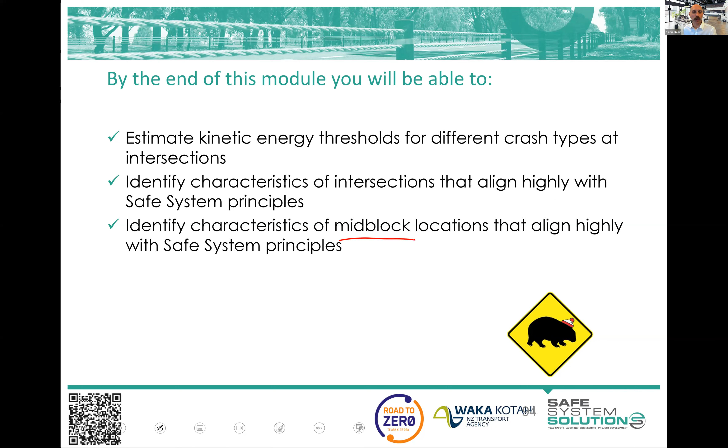Now it's an interesting time with independent assessments of transport projects in New Zealand. Road safety audits have been around for quite a while - I'm just trying to think, in New Zealand, 25, 30 years almost. They're pretty well known, pretty well respected as an independent assessment of a transport project to try to ensure safety.

Design reviews are commonplace as well. So if somebody is designing up a new intersection, new shared path facility, whatever it is, you would expect there to be a design review process where somebody who is not the designer would review the design - common practice there, checking calculations and checking logic and those sorts of things.

Safe system assessments then came along, and they sort of overlapped road safety audits a lot, and a little bit of design review in there.

Then there's sort of safety in design, which is thinking about, well, can whatever we want to create be built safely, be maintained safely, be decommissioned safely even.

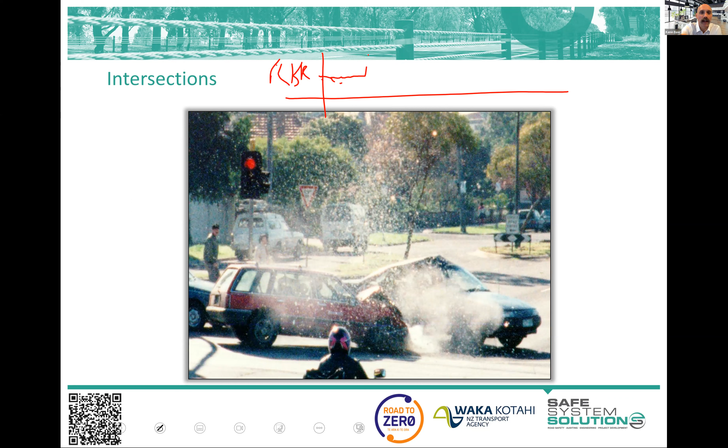But anyway, net risk - if you look at a length of road, and it doesn't really matter if it's a rural length of road or an urban length of road, you'll see risk, and it'll have some level of risk, and then it'll have spikes. And the spikes will be the intersections. That's not a great diagram, but that's kind of what it's going to look like.

And the intersections are an interesting spike in risk for a number of reasons. Well, first of all, you do have that obvious vehicle-to-vehicle conflict potential, and you see the picture on the screen there of vehicle-to-vehicle conflict. You have a point where then you've got pedestrians crossing, cyclists crossing, people wanting to turn. So I use the term turbulence - there's a lot of turbulence at an intersection.

You end up with a lot of roadside hazards around intersections: signal pedestals, light posts, and if you've got power lines that need to turn a corner, you've got to put a pole there too. So you end up with a lot of physical infrastructure around this. Because of that turbulence, vehicles will avoid it, and we see runoff road crashes increase at intersections as well, with vehicles leaving the road into lots of fixed hazards. It's a fairly nasty mix.

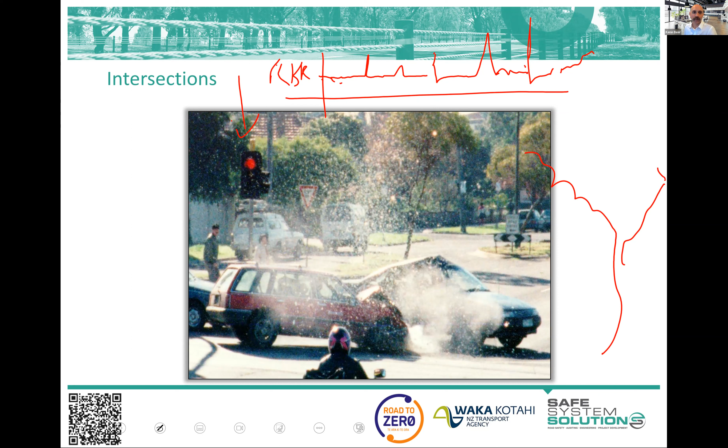Monash University Accident Research Centre at one point came up with high-level principles for what would make an intersection better aligned with safe system principles. You can see they've got fewer vehicles and fewer intersections. They're pretty high-level, strategic planning style ways to think about it, but it's nice and neat because we can get big wholesale change if we look at fewer vehicles and fewer intersections.

If you remember back to what we talked about at the end of the last session, we talked about exposure times likelihood times severity — that was our risk formula. Those fewer vehicles and fewer intersections are about exposure, less areas where vehicles can have that conflict. Fewer conflict points per intersection is a likelihood factor — the intersection's still there, there's still road users going through it, it's just less complicated, there's less turbulence, less points where they can crash, so the likelihood of a crash comes down.

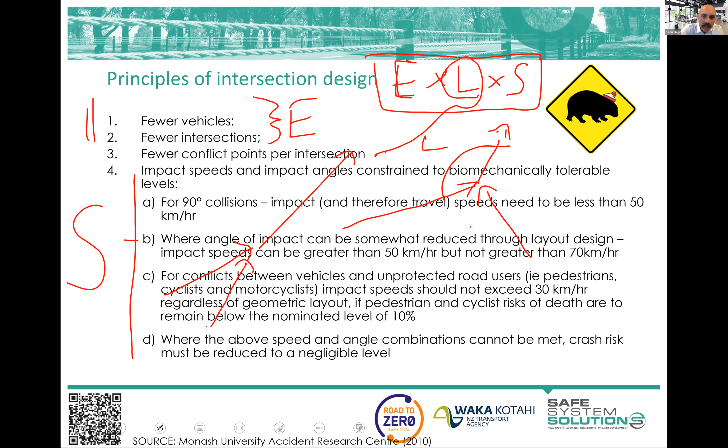You've got a certain energy that goes into the environment in that sort of crash. But when you put more angle on it, more of the energy goes into the environment — you sort of bounce off, don't you? So this has more energy transfer to the occupants of the vehicle than that. So if we're able to get a bit more angle on our crashes, from that perspective, we can have that crash at a higher speed.

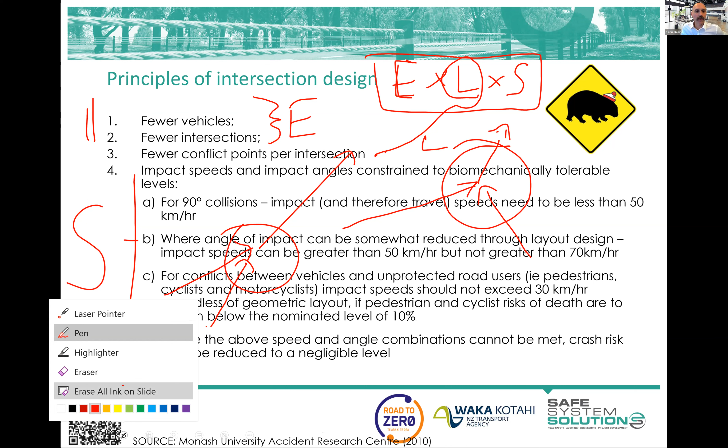When we get into having vulnerable road users crossing and involved, we're talking about not exceeding 30 kilometers per hour, but really we want to be lower than that, where we've got that pedestrian conflict. Next module, I'll talk a bit more about context around where in transport planning we'd think about these lower speed environments, and how you could design a high speed environment to be safe, or a low speed environment — it has implications on the functioning of your city or region. Now, if you can't get these, we're saying we need to fundamentally change the setup.

You can operate intersections at quite high speed, passenger vehicle to passenger vehicle, with high alignment with safe system principles. But you just need to do it so that the relative change in speed is not as great. Let me show you, like an on-ramp or big acceleration lane — this can happen at 100 kilometers per hour when these crashes happen.

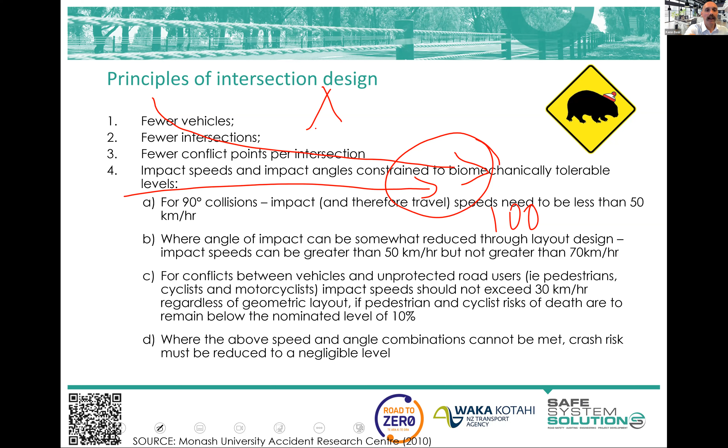But the delta V, the change in velocity, is very, very small. Certainly you want to think about what happens afterwards, run off road and all of that, but in terms of the initial crash, the forces and the transfer of energy is within tolerable limits. And that gives us good opportunity to continue to operate our high movement passenger vehicle or freight routes in a safe way.

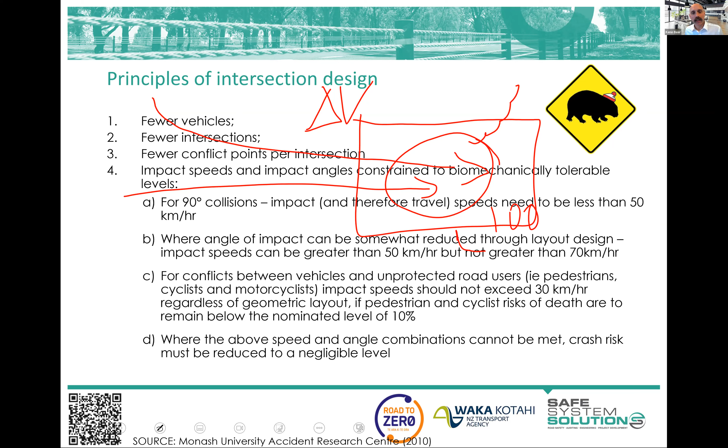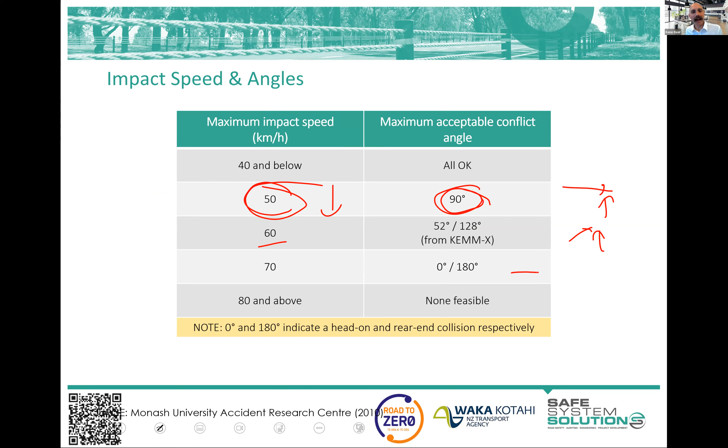So that's all quite theoretical, really. I've got some more figures here for you. When we talk about 90-degree angle crashes, that's 50 kilometers per hour or less. When you get more angle on it, we can go up to about 60 as the limit. Head on and rear end, we put that at 70. They're just broad brush speed-angle passenger vehicle categorizations.

So when you're looking at designs or existing intersections, you can have a look at the angles you think crashes will happen at.

Now, you don't need to be this precise, but if you're in CAD you can do this very easily, though you don't need to. You can just look and go, well, a vehicle coming out here and a vehicle coming there, that's about a 90-degree crash, isn't it? So we think about that for 50 kilometers per hour or less. It might be 104, but realistically, 90 is close enough.

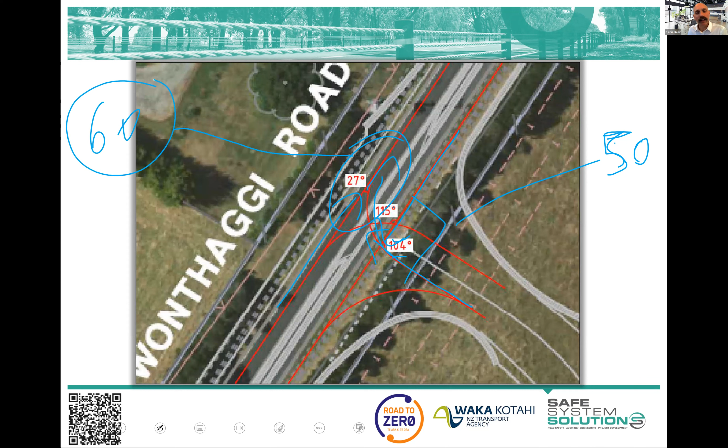And this one, they're going to be turning. We can probably go to 60 on that or below. So you're starting to look at conflict and think about speeds, and it gives you that relative point.

You think about the secondary crashes and run-off road crashes around intersections. Here's some research done by the Centre for Automotive Safety Research out of the University of Adelaide, where they looked at secondary crashes which resulted in death or serious injury - something had occurred at the intersection where vehicles had collided.

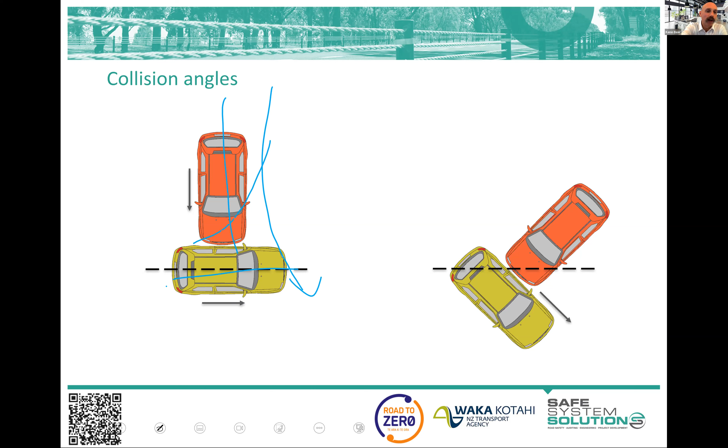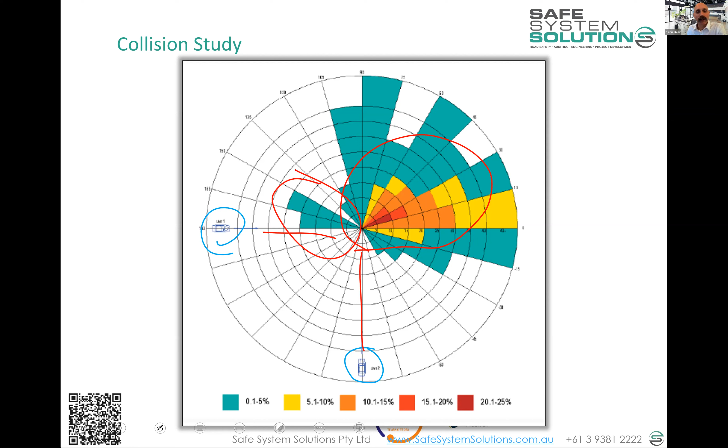Now, it could have been direct impacts like this, but it could have also been vehicles clipping, avoiding, and just clipping the end of vehicles and the like. But then they replotted that onto the same axes. So you've got a vehicle down here, a vehicle down there. They come in, they crash, and of course the bulk of crashes go out there. Do we need a lot of expensive research to know that? No, we didn't, but it's there for us if we do. There's a few interesting ones spinning off into those areas, but it's fairly obvious, I think.

Okay, enough of me talking. I'll do a little bit of explanation into this exercise I'm going to get you to do. I'm going to give you a little bit of time to have a think about this, but let me introduce it, and then you're going to do some thinking and come up with some ideas.

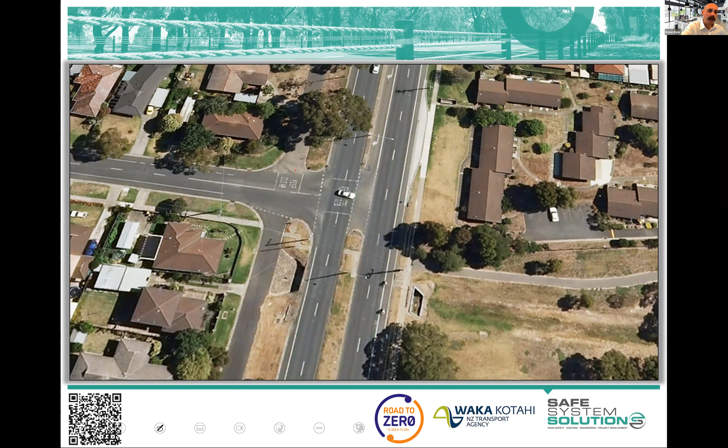Here we go. We've got an intersection. This major road, well, it's a state route, is a 70 km/h speed zone, and it carries about 21,000 vehicles a day at about 12% CV, heavy vehicles or commercial vehicles. Okay, so it's a pretty decent state highway.

This side road has a 50 km/h speed limit. It has about 2,000 vehicles a day. There's a school down here. What else can I tell you? That's a bus stop there. It's a shared user path. This is like the culvert drain - water goes in there and comes out there.

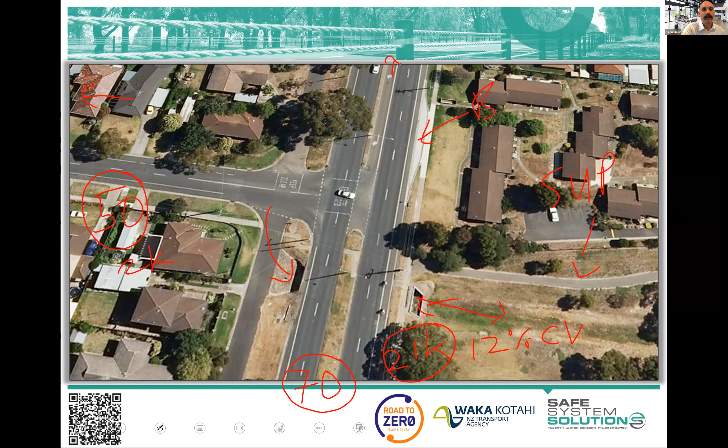What else can I tell you? Up the road, about 500 to 700 meters, maybe a little bit more, is a set of traffic signals. And there's another set of traffic signals about 2 kilometers down this way, or maybe 1,800 meters. More signals down there. Yeah, I think that's pretty good.

Let me show you it from ground level. So there you go, you can see it operating - vehicles, there's our bus stop. Got lighting, got this little service road thing going on here, which is a two-way service road.

Have a look from the other direction. There you go - there's your shared use path over there, shared user path. That's that drainage culvert-like thing.

So your task is to remove fatal and serious injury crashes at this location. Going forward, we don't want any more ever at this location. But you've got a budget constraint - I'm going to give you 3.5 million because I like you, I'm upping the budget.

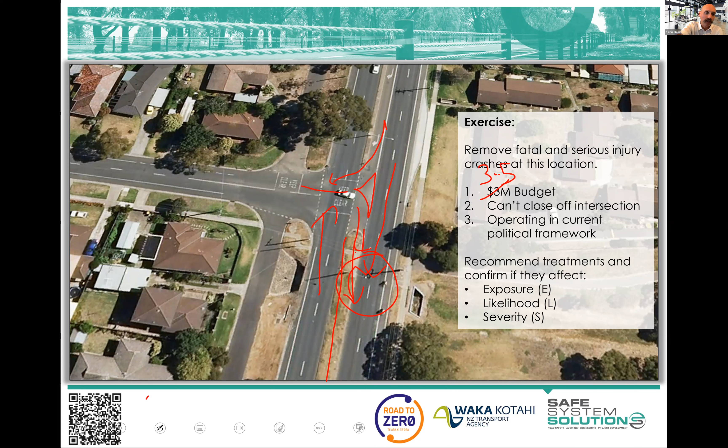There was really good work done by Shane Turner and a few others in New Zealand on the seagull intersection assessment tool, and I'm pretty sure we could put that into the resource. It shows you what situations a seagull may actually perform well in, but it's not a lot of the time that it's actually a really good treatment. So yeah, I can understand why New Zealand is making the seagull extinct. Okay, what else did we have?

So then we had some people talking about raising parts of this intersection. That's interesting, people talking about raised platforms, raising the intersection. We had people trying to go with the left in, left out, which I do like, because that simplifies the thing, removes a lot of that turbulence, but I said we can't really do that.

So bus priority transit lanes as an exposure measure, that's an interesting one, because yes, it actually does link in nicely with safe system principles. Putting people onto a safe form of transport, less vehicles, less exposure, and it is an exposure one. I'm just skimming through these wonderful comments.

People trying to get pedestrians separated to change the exposure, and that's good. So we talked about utilisation of the drainage facility in one way or another. I'm a big fan of doing that.

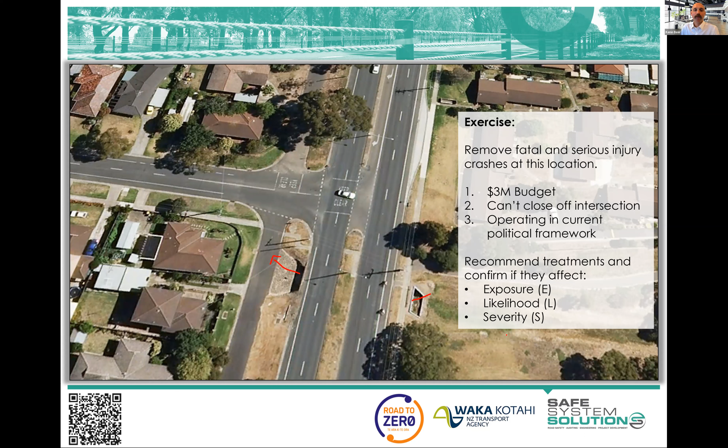Now, some people freak out, saying we'll have pedestrians drown when rains come. Well, no, there are a lot of situations where you use existing structures and facilities, and pedestrians don't go in there if it's starting to fill with water, so that's a good thing. You've got to think holistically about personal safety, so there's enough light and it's attractive. But if you've got existing bridge structures and can link with your shared path network, it's just good use of money. It's so well aligned with safe system principles, and it removes exposure to crashes.

It's a bit expensive on this one, but you haven't been there and looked and worked out all the details. I think it's a great thing people are thinking about that.

We've got some people thinking about how we would get pedestrians across the intersection safely. I'm going to jump out of people's comments, but again, I thank you for that wonderful input. I'm going to talk to a few things here.

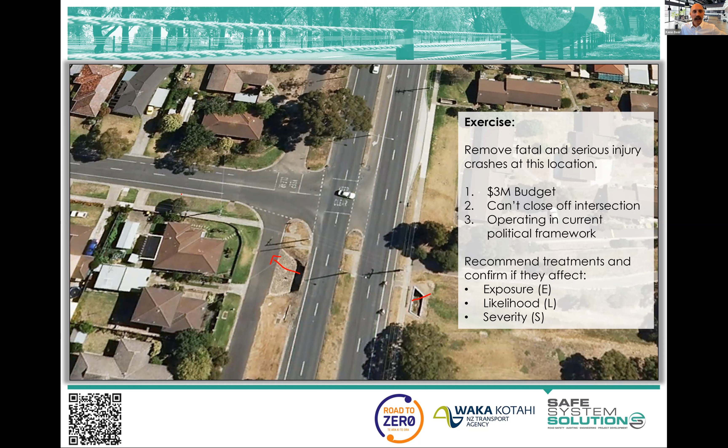So some people were saying, well, signalise it, and then we talk about the costs and things, and signals seem to be a preference from quite a few people. And signals squarely influence the likelihood of crashes, okay?

Now, yes, there are going to be scenarios where there are crashes at lower severity because the signals were there. It went orange, and then they decided to brake at the last minute, and then they crashed, but it was lower speed because of that. But there are going to be many scenarios still where the crashes will be at as high, sometimes even higher severity as it currently is with a passively controlled give way set, sorry, give way control, so a give way sign.

So we attribute traffic signals, in terms of their risk reduction characteristics, to the likelihood and only likelihood. They lessen the chance of a crash happening.

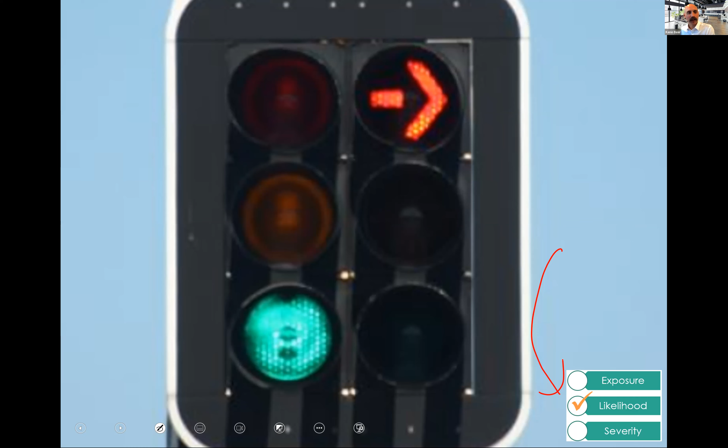Interestingly, when we look at any major metropolitan area, in this case I did pick Melbourne, but I could have picked Christchurch or Auckland. In outer suburban areas where you've got a bit of speed up on your major roads and you hot-spot death and serious injury, you see all of these large signalised intersections. In fact, all of the hotspots are.

That's interesting, isn't it? So there's something weird going on here, isn't there? Because signals, aren't they a great form of control? Almost like the ultimate thing you'd get to with an intersection, isn't it? Well, no, it's not.

Not from a safety perspective on these high-speed roads. And when I say high speed, I'm talking about 60, 70, 80 kilometre per hour roads. And this is because people run the red lights, and they run it at speed and at bad angles.

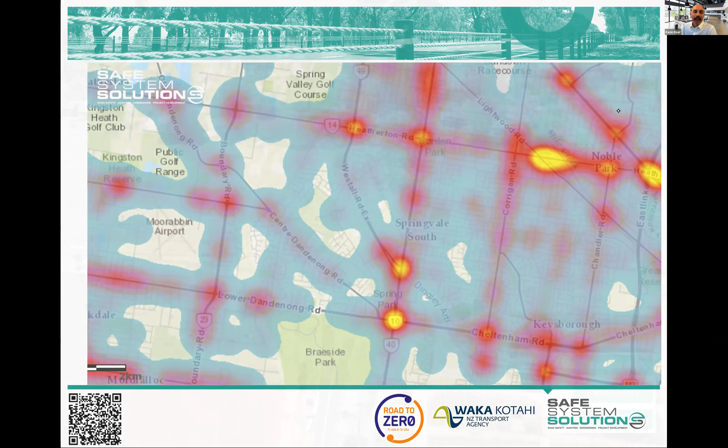Well, when we look at a roundabout, roundabouts are all about the severity of crashes. And why is that? Because people approach a roundabout, they slow down, the angle of crash is better, and all of the incidents happen at far lower speeds and lower transfer of kinetic energy. This is passenger vehicle to passenger vehicle crashes that I'm talking about.

But we had to sort of dismiss the roundabout there, didn't we? Because it was just going to cost too much. Now you can look at this one, obviously not the same site, and you can see it's big, isn't it? It's big, it takes up a lot of land. Why is that? Well, you've got to get a big truck to go around here, or a bus to be able to make that turn, or even a U-turn. You've got to have a swept path, and to do that, it has to be really big.

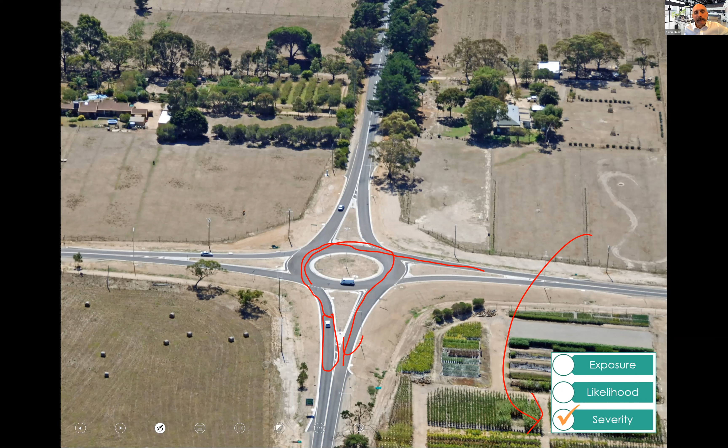But I wonder if we need them to be that big. Again, a different road environment, not the same as the one we looked at, but that roundabout's pretty small, isn't it? And well, it's actually just some paint. But why would this provide any road safety benefit?

The reason it provides a surprisingly high road safety benefit is because anybody approaching this, well, they don't think that they have ultimate priority. And that's a major win. This is kind of the UK equivalent of a four-way stop, which is disrupting ultimate priority, because as drivers have that continued priority, they tune out, they don't look around, they don't slow down. But you can disrupt it in these ways.

People get very worried about these smaller roundabouts in terms of how fast people will be going through them. We can dampen speeds down with these things on the approach, and there's lots of great opportunity.

But why are roundabouts performing so much better? If we just go back to passenger vehicle crashes, some road safety engineering 101 here. Here are conflict points - these are the points where you can crash. There are far less conflict points at a roundabout, and the conflict points that exist are friendly angles.

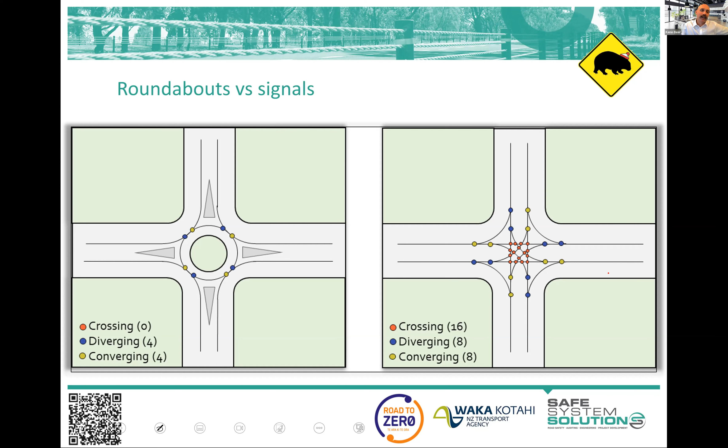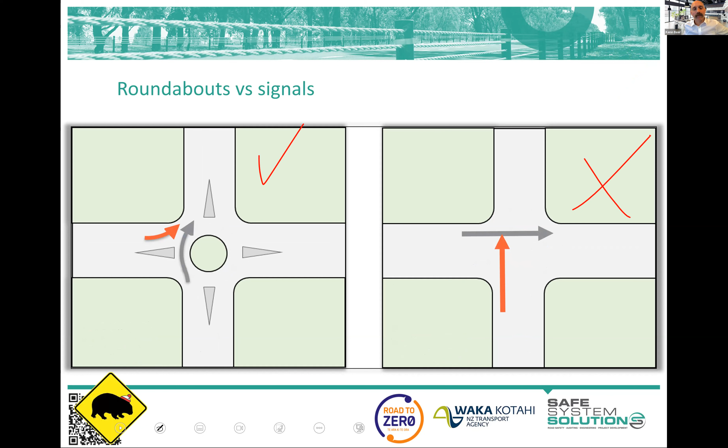They're the angles that crashes can happen at, your worst angles. This, good. This, not good. Lots of wombats today. This is the one that...

So what happens when people are driving the road network is that we would love them to be alert and compliant, to have had a great night's sleep, had their coffee, concentrating really hard on the driving task. The reality is that people drive in all states of consciousness. They've worked a double shift, they're slightly intoxicated, they're thinking about the fight they had with their partner, thinking about the exam they've got coming up - they are often just not with it. And we can get annoyed at that, and say you need to be taking this task seriously. The reality is that is being human.

I was chatting to Bridget Doran, for those who know Bridget, about her PhD on what drivers do and think about during the driving task. And unfortunately, there is a very small percentage of time that it's actually focusing on what is going on in the road network. And that's within her study of people who were sort of at least sober and at least, well, generally well rested.

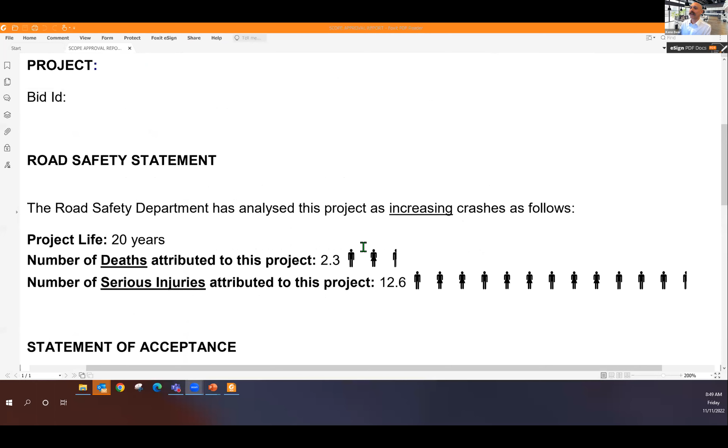Now, actually Kathy, have I got time to jump into this? I'm leaving the slides, Kathy. Here we go. Okay, sure, leave the slides. Sorry, I want to dig out a memo. Okay, nice story, and I did tell it to another group, and they enjoyed my little story, so I thought I'd do it again. I found it. It's story time again. Story time. So this is, let me... this is a memo.

I was in VicRoads, the Victorian Road Authority, in the road safety department, and there was a massive congestion easing program. It's like 15 years ago, it's called Keep Melbourne Moving. The traffic engineers had done a mass amount of modelling and worked out there's all these spots on the network slowing things down for cars. And here's this massive program. What did the program involve? Well, it pretty much involved ripping out roundabouts and replacing them with traffic signals, because you can get a bit more flow through them and control those peak periods better. And there were some other bits and pieces.

Anyway, so all of these project designs were coming into the road safety department for their official road safety review, which is where they expected us to look at the signal phasing, line marking, signs, mast arms, desire lines, and those things, which we did. But we also, myself and a colleague, started putting this memo on the top of the package we'd send back to the region. It says: the road safety department has analysed this project as increasing crashes as follows. Project life, 20 years. Number of deaths attributed to this project, 2.3. Number of serious injuries attributed to the project, 12.6, or whatever we calculated, which isn't a hard exercise to do. The above trauma is accepted by... and then we left it like that.

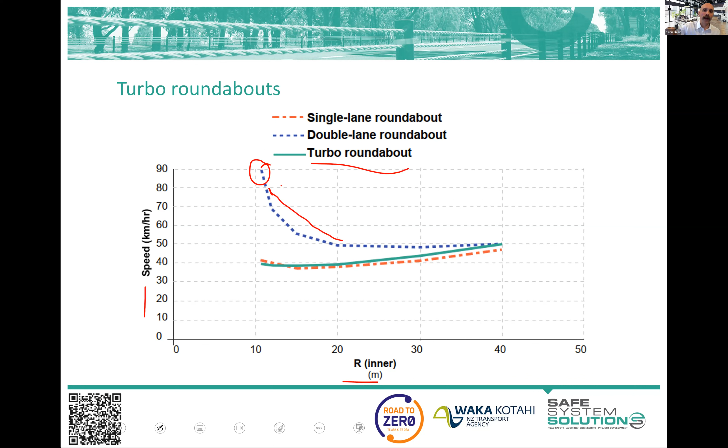Not all roundabouts perform the same. I'll jump through this quickly, but it's some safe system aligned thinking. Single lane roundabouts versus double lane roundabouts—we're starting to see differences in safety performance. Speed is always a pretty good proxy for safety performance. Looking at the radius of the roundabout, a 2-lane roundabout has high speed through the roundabout. Turbo roundabouts, interestingly, perform the same as a single lane roundabout—a turbo roundabout is a double lane roundabout, but it's got a raised concrete separator on the approach and throughout. So a vehicle comes in and can't straight-line it through, and it channelizes, so you don't get those late last-minute moves.

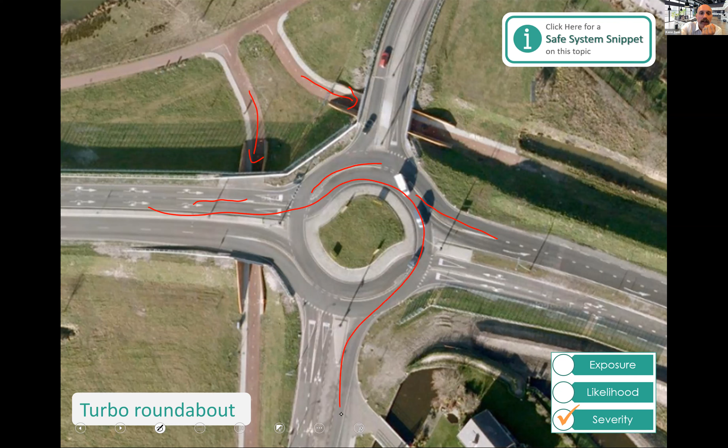For those talking about cyclists and pedestrians, that's how you cater for them at a roundabout. Pretty awesome. Turbo roundabouts do a wonderful job—if you want to turn right, you've got to do that move. There's another turbo roundabout example.

I like this picture because we're seeing some conflict—look at the angle that's happening. Beautiful. And we know the speeds are going to be low, don't we? That white vehicle is coming in, and it's quite a radial roundabout, for those who play in roundabout design, so we know speeds will be low. The angle is good—mistakes happening on the road network, and we know it's not going to result in death or serious injury.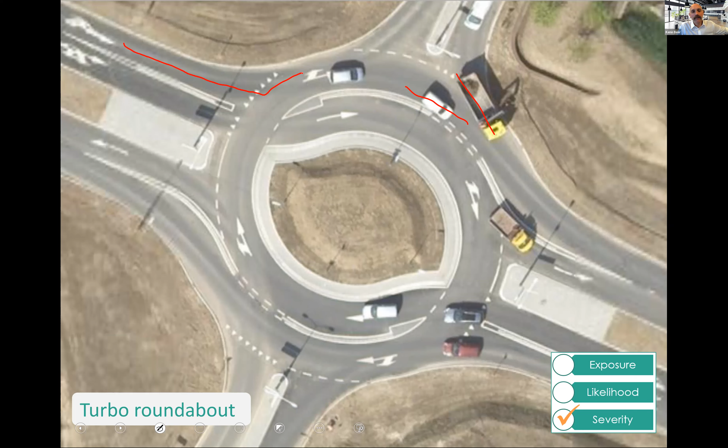This one's pretty good, another turbo roundabout. We look at this and go, what on earth is this? Well, there was a Dutch engineer who came over to spend time with us doing roundabout design for cyclists—how to design roundabouts for cycle safety. I was showing this Dutch engineer this photo—this is in the Netherlands. I said this is just amazing, and he was like, yeah. I said, in Australia and New Zealand, we'd probably have this as a large, high-speed signalised intersection.

It might have got grade separated at some point, but most likely would be a large signalised intersection. The Dutch engineer just could not fathom that, and said, well, what about all the death and serious injury? Why would you do that? How could you possibly subject your community to this? They'd rather do this—with the massive land take and huge cost—than even consider going with something we just take as run of the mill. This one isn't signalised, and I suspect at ground level it would not be as confronting as it seems, but nobody's going through fast, and the angles of impact are going to be better.

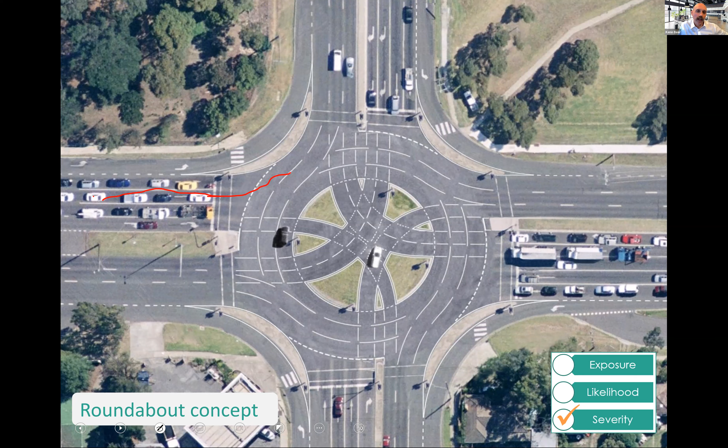It's fun that I'm just super excited now to see so many people talking about raised platforms and raised intersections, on that example that we were doing there together. And why is that? Well, because 10 years ago, nobody would say that. Absolutely nobody would, because it was a major arterial, state highway, it's got 29,000 vehicles, it's got freight, it's got buses.

You couldn't possibly do vertical deflection on that in people's mind. But now we've evolved and we've moved forward, and we understand some of the European raised platform design, that they're like this. They're not these sharp speed humps as such. They're shallow platforms to wash off appropriate speed.

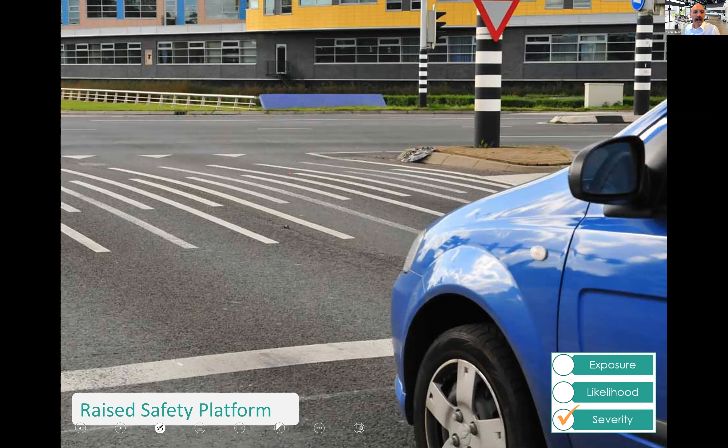And that's what was proposed at that intersection, because the costs couldn't get in that full-size roundabout, weren't prepared to go with a smaller roundabout. There's, upstream there were signals, downstream there are signals. They had unbalanced flow, so a roundabout wouldn't have performed that well unless you'd metered it and done other things. So they landed on signals, but it was great.

They were at that point. They said, well, if we know that signals in our area are presenting a lot of death and serious injury, and we're going to build another set of signals, are we really going to think anything different is going to happen? I said, no. We need to change something up here.

And yeah, they went with the raised platforms on these two approaches. They didn't do anything raised over here. Why not? Because these vehicles coming out and going in are not the bullet vehicles. These are the ones that do the damage, right? So you only need to slow them down. Well, these are going to slow down on their own accord. That's for a T intersection like this. If it's crossroad, it's a different story.

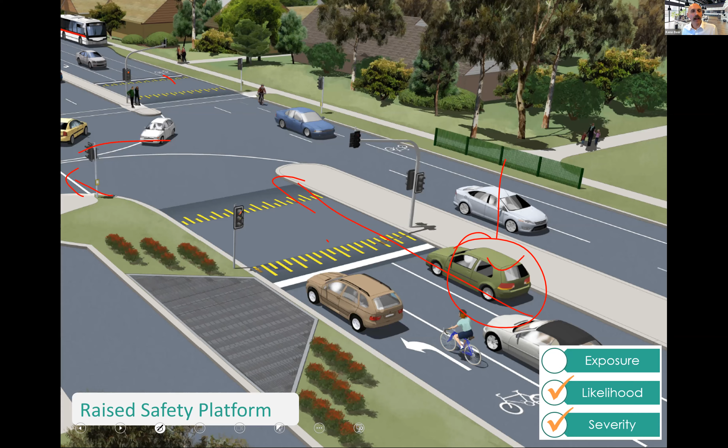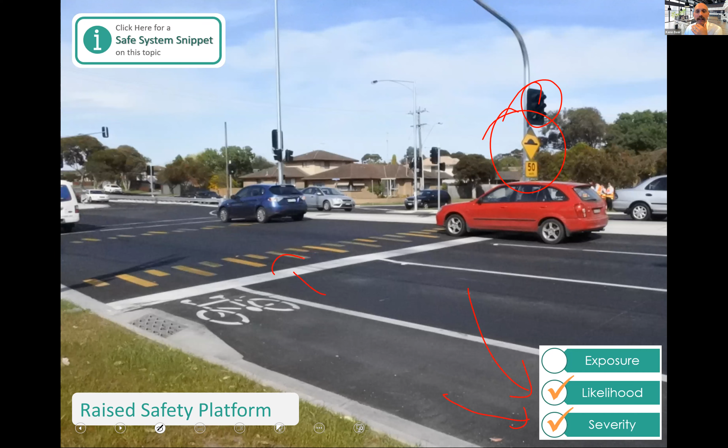And what do they design that for? 50 km/h, because that's the right angle vehicle to vehicle impact. Now, they could have looked at pedestrian and gone down to 30. This is where they started to get into this balance - what's the function of this road and a whole lot of other things. So it's not quite there, but it's very well aligned with safe system principles. But the likelihood of crash is down because of the signals. The severity is down because we're actually washing off speed. Vehicles slow down on the approach to this.

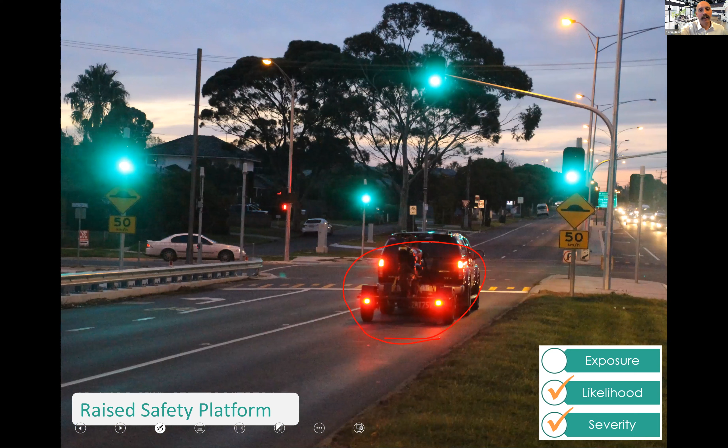And here's an awesome picture. I was out there with a colleague. We were doing the post-opening road safety audit of this. And look, we've got a vehicle slowing down on the approach to a green light. Oh, right. This was great. And the traffic ops people, they get angry at this. Like, oh, it's so inefficient. And you're like, well, if we'd done the roundabout, everybody would have slowed down always, and nobody would have complained about that. It's just that this is different, and people don't like change and all sorts of typical stuff like that.

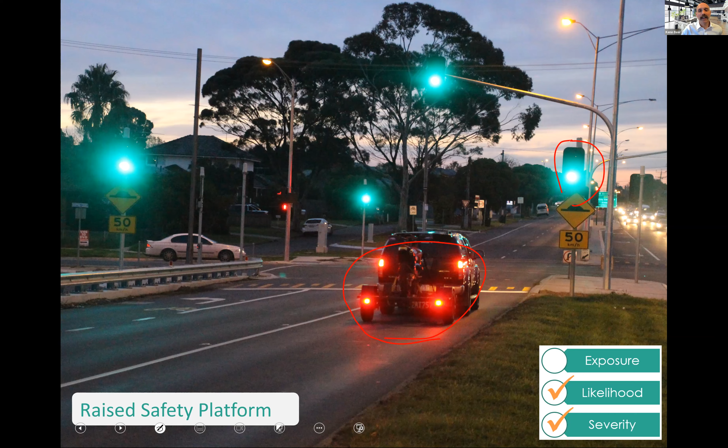So it's pretty exciting. And here's another little exciting bit out of it. Some of you may know a term called the dilemma zone. The dilemma zone is a traffic engineering term, which is a point in time and space where a driver is in a dilemma as to whether they put the foot down and go because the orange light has appeared, or they slam on the brakes and stop. And the raised platform as a feature in the intersection just significantly reduces the dilemma zone to a point where almost all drivers in what was previously the dilemma zone stop, which is just another good win.

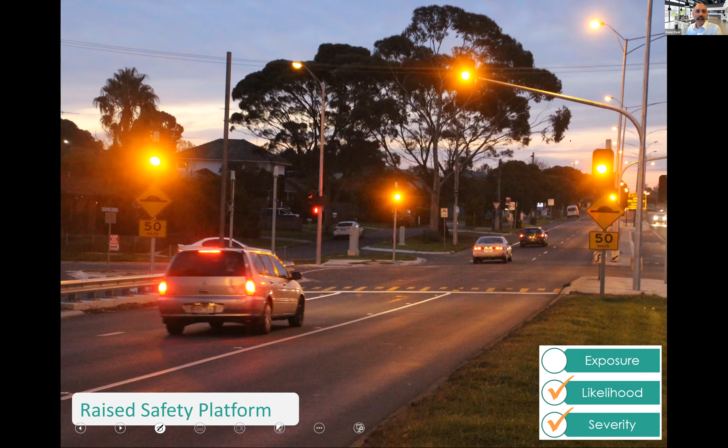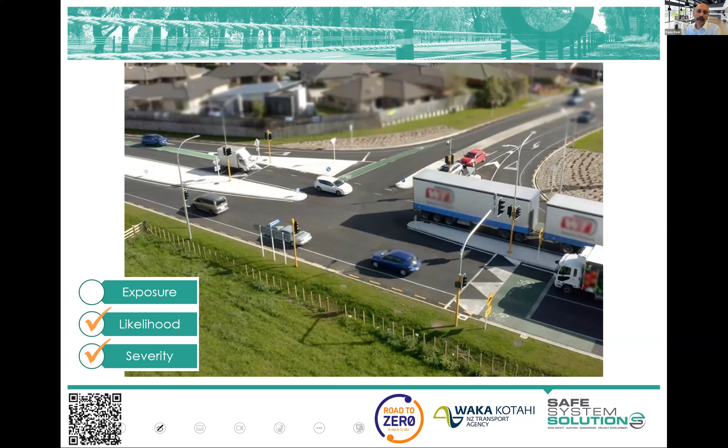Extra spin-off win. And it's great to see Hamilton City Council putting in some raised signalised intersections down just in sort of outskirts of Hamilton there. Some people will know this one. Thomas Gordonton is the intersection. And that's in and performing beautifully. And this one really made me quite happy.

So this is an intersection here, Dalton and Childs Road in Thomastown. It was a roundabout, and in another congestion easing program, 10 or 12 years after the one I talked about, the roundabout was being removed and replaced with traffic signals.

But as part of the process, they had to do a safe system assessment. And the safe system assessment said you're going to make things worse, showed that this is not going to be good, and suggested a raised intersection. And that's what went forward.

I mean, I'd prefer that to be 30 or even 20, but that's neither here nor there. It's a deficiency, and that should be addressed. But nonetheless, we saw the roundabout removed, signals installed, but a raised platform to at least ensure that the safety was going to be maintained, if not improved. And that's exciting.

Plus Dalton Road carries about 55,000 vehicles a day, major bus route, heavy vehicle route, major emergency vehicle route, and Childs Road is about 25,000. These are big roads, so yeah, it's just exciting, and you can see that evolution.

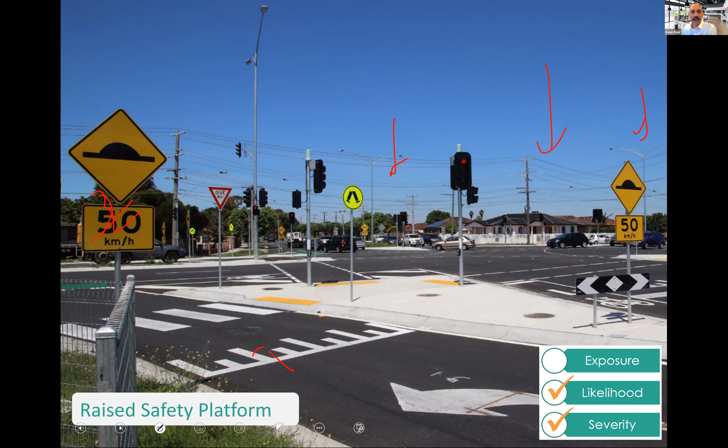So they don't need to do the memo anymore and get everybody all worked up. They can just simply have a safe system assessment process. People still get worked up.

Anyway, lots of design guidance now for you on raised safety platforms and raised intersections. I still like this 03-07 road design note out of the Victorian government, I've had some input into that. But there's some wonderful New Zealanders who put together Austroads report 642, effectiveness and implementation of raised safety platforms. That's a good one, it's got Hamilton on the front cover there. Really good stuff.

I think we better have a little quick break, eh? Yeah, absolutely, thank you Ken.

It's interesting what you talk about, that these are relatively new treatments in this space. They haven't been around for decades and decades, they've just been around for the last 8 to 10 years or so, in Australia and New Zealand, of course.

How common are signalised roundabouts? Signalising roundabouts is not as common as I'd like to see it. Signalised roundabouts retain a lot of the benefit, you can encourage more traffic flow, and you can get safety for pedestrians.

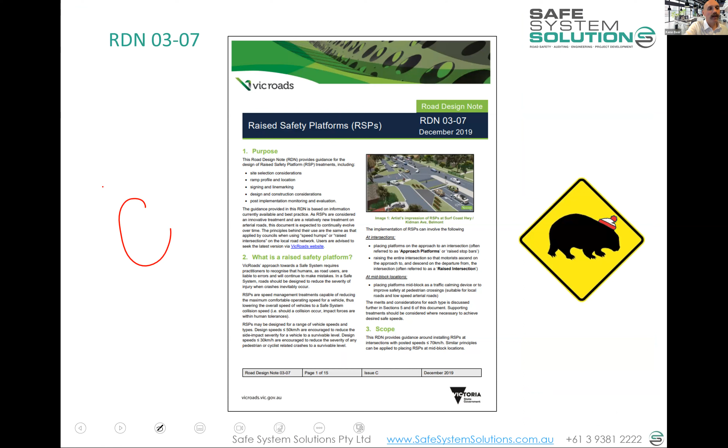I'm going to try and find a little bit of space to draw. If you have a roundabout and you have unbalanced flow going on, you can signalise just one leg, and I like to do it often with a pedestrian crossing, although it can be problematic depending on how your flow is. Or you might just have a splitter island and only signalise half of it, if you're worried about flow banking up, without it being a pedestrian crossing.

Let's do that. And then you simply put a loop in there, back down this road at some point. Sorry, I'm all over the place here, Kathy. A loop down that road, we might all take a break while you finish my drawing.

You put a loop down there that triggers these signals when the queuing gets back to a point down the road. So you go, okay, now the queue's X amount, make that red. Then these vehicles go off to where they need to go, and then you drop it back. So it's called metering a roundabout. And then you can meter one and then another and then another, and you can extend the life from a traffic perspective significantly.

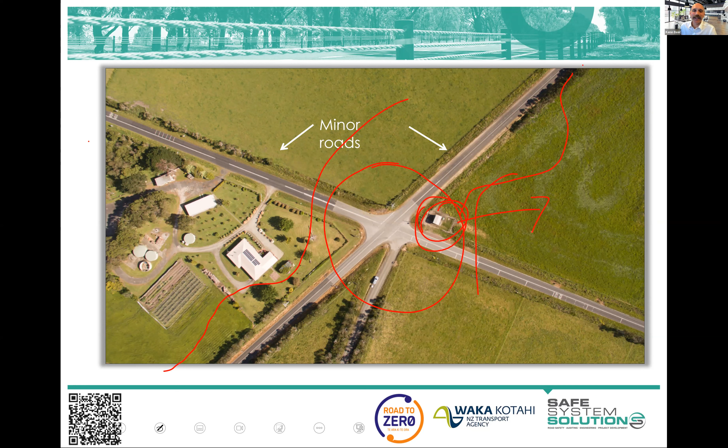Anyway, so they said we'll just put in some right turn lanes and some warning signs. But again, the safe system assessment says well, that's going to reduce the likelihood of a crash, but are you addressing the severity of crash? So, back to the drawing board - what else could we do?

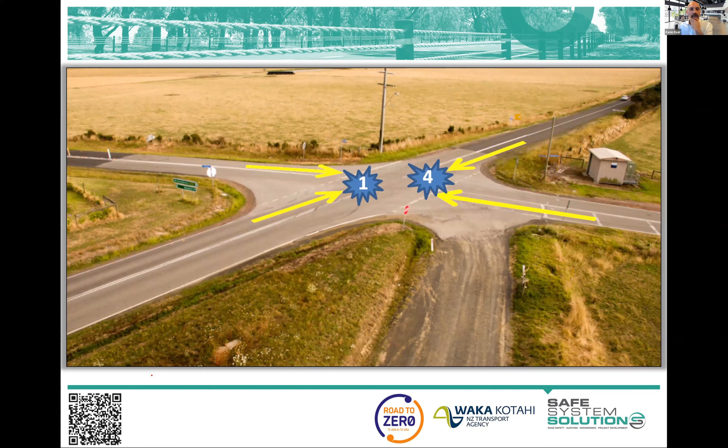So that's the intersection there, high speed, arterial road crashes, but they really looked at it and said let's go with that smaller roundabout - something a lot smaller - and see how that performs. So this was a compact roundabout, worried about the speed people would approach it and go through it. You can see they've used raised platforms to slow vehicles down on the approach. A very tiny little roundabout with a big concrete apron around it.

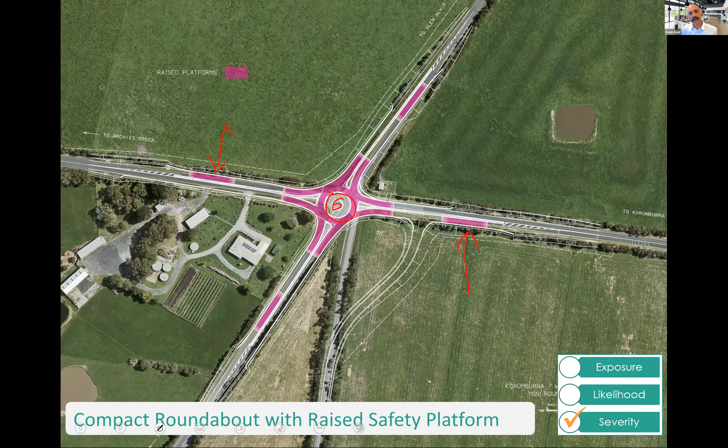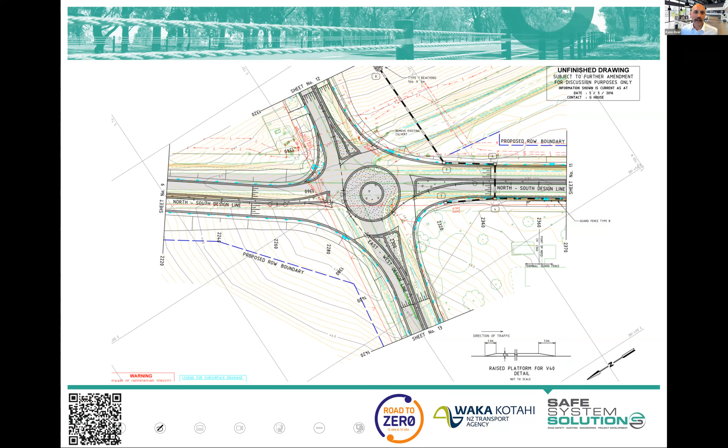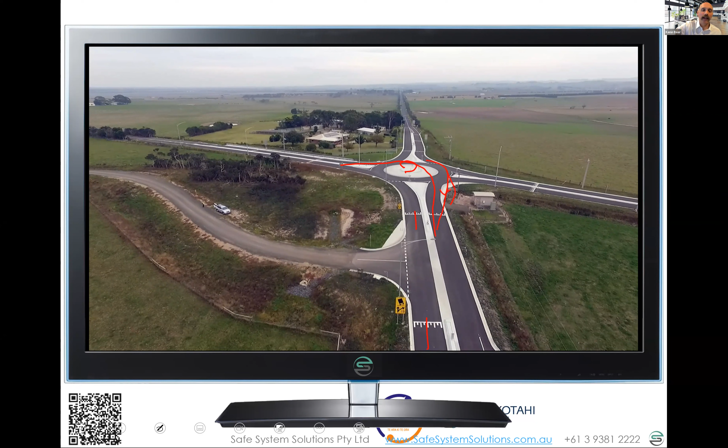Bigger concrete apron around it, raised area. I presented this at the recent Australasian Road Safety Conference in Christchurch, as we've written a technical design guidance document for compact roundabouts. Here's the roundabout - see the shallowish raised platform first, which kind of replicates the first reverse curve to slow people down on the approach, raising up the next one a bit sharper. Very small little roundabout, large vehicles sort of sweep over this, mount their island. There's a little bit of widening out here, with a concrete apron there too.

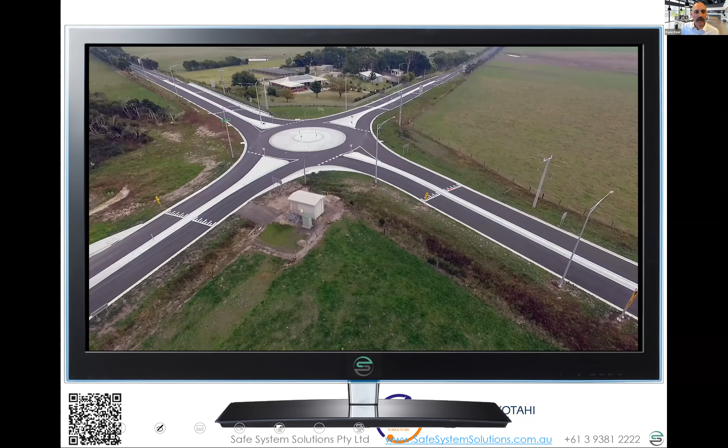I put it up for those who are designers - it's fascinating - but also for those who aren't, it's pretty interesting in the sense that people are now pushing and saying it's not acceptable just to do right turn lanes and hope to reduce the likelihood a bit. We've got to start really addressing the severity of these crashes.

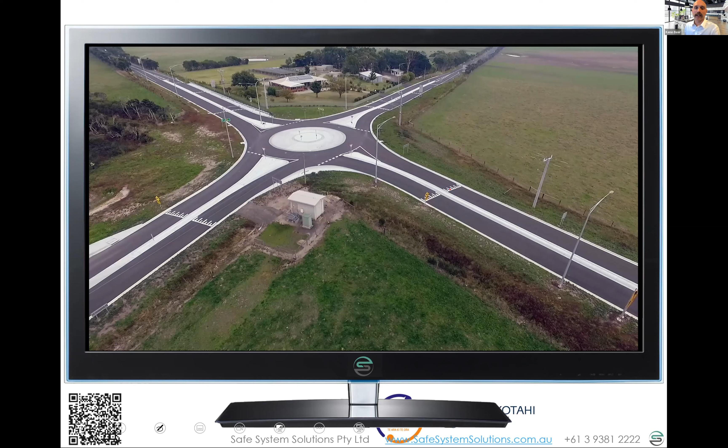Quick quiz, Kathy, and I see maybe questions and hands being raised - it's all happening in the background, so hopefully it always is. So tell us the location and cost, please. We want the stats. Go.

Yeah, so I think a full-size roundabout was going to be $7.5 million or something like that, and that one came in at a bit under 4 - significant saving, about half the cost. And the location is a place called Lance Creek in Victoria, and I can send anybody that would like the detailed design set of that.

Yeah, that'll be good. Was most of the cost because of land take, or because it was kind of the first of its kind? There was a bit of first-of-its-kind extra cost, but there was also a bit of land acquisition, then pavement, civil, lighting, all of that usual stuff.

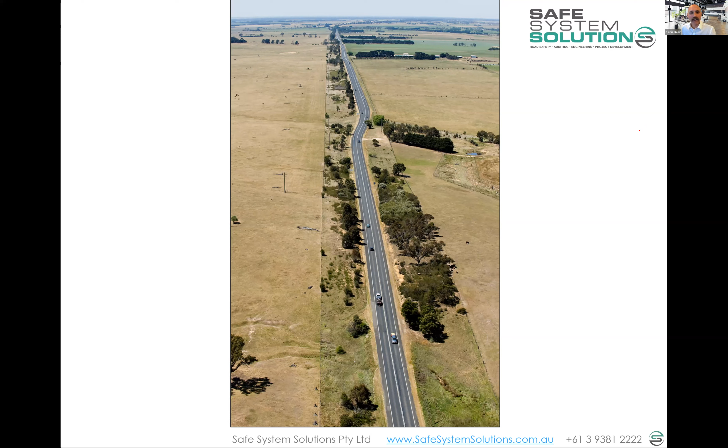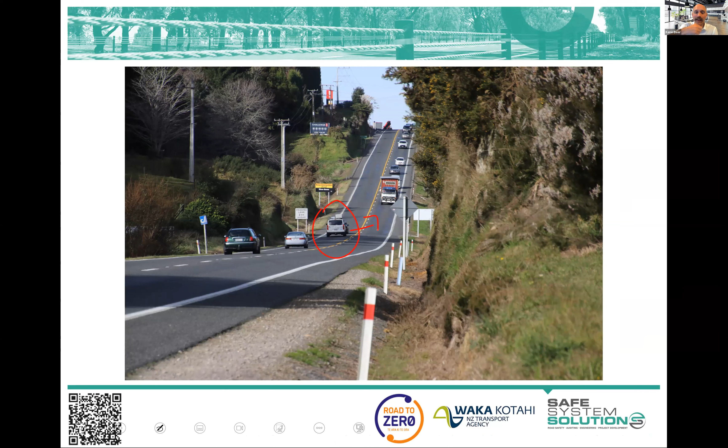They happen at a speed that is just absolutely unsurvivable. And so we see a lot of the New Zealand network that looks like this, operating at 100 kilometres per hour. And if that vehicle is out of its lane, they won't survive that - and they hit that truck. If that vehicle goes off the road, they're unlikely to survive that, depending exactly whether they roll or hit a specific object or the like.

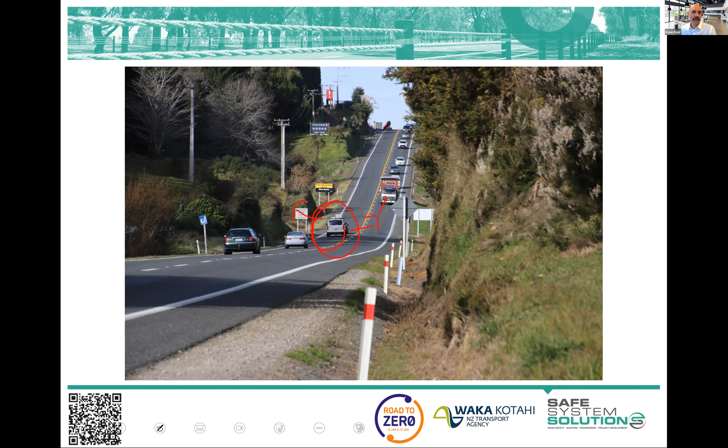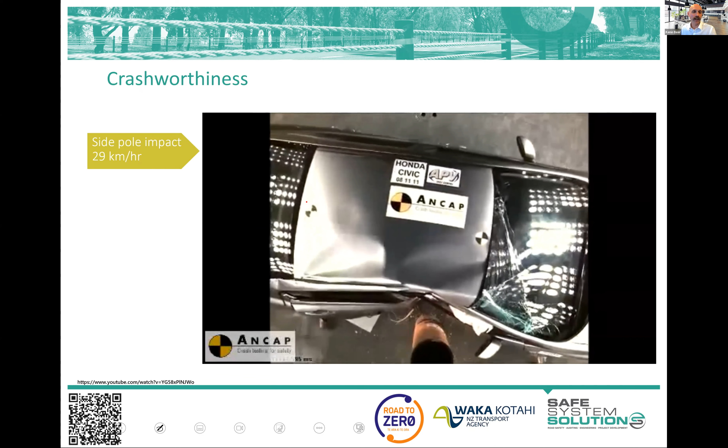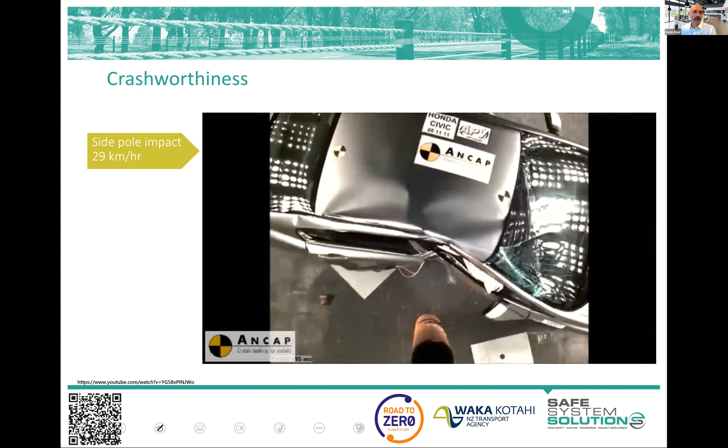Going to be very bad. We talked about the speed of the ANCAP crash test - it's gone up from that 29 kilometre per hour one, which I'm showing in the video, to 32 kilometres per hour. But the speed we travel with fixed hazards - let's have a look at this one. Now, this is going to be a bit more graphic. This is an estimated 60 kilometre per hour impact with a fixed hazard.

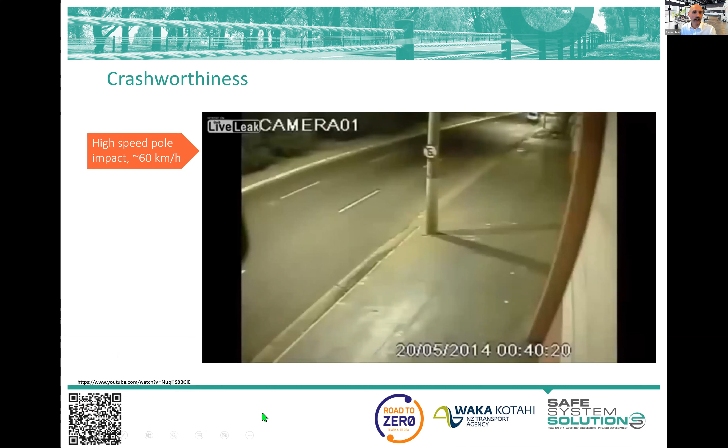That just shows the absolute violence of these crashes, about 60 kilometres per hour. The forces are just astronomical, and it's all concentrated into that point source.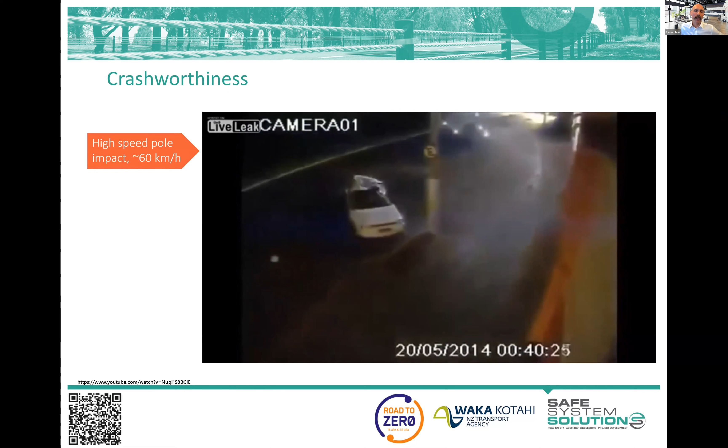So if we remove all these trees and power poles and everything like that, we lessen the risk, but we don't eliminate it. Plus, it's becoming near impossible to do that, which wouldn't be a good thing. We don't want to cut all the trees down, but removing the power poles would be a good thing, I think. But rollover crashes start to become a factor into it.

So as we clear more area on the roadside, we start to see the clearing area free of hazards - clear zone - and we see runoff road crashes coming down, but rollover starting to increase, because vehicles have this area to yaw. So what happens in a runoff road crash? People fall asleep or they've been distracted by something, not looking, they leave the road, they wake up and yank the wheel back. They may hit an object as they're doing that, or they might overcorrect, or they might start rolling. The more space there is, the more chance they're going to roll. Now, rollovers are a less severe crash, but they certainly have some pretty significant spinal injuries, head injuries, and deaths do occur as well.

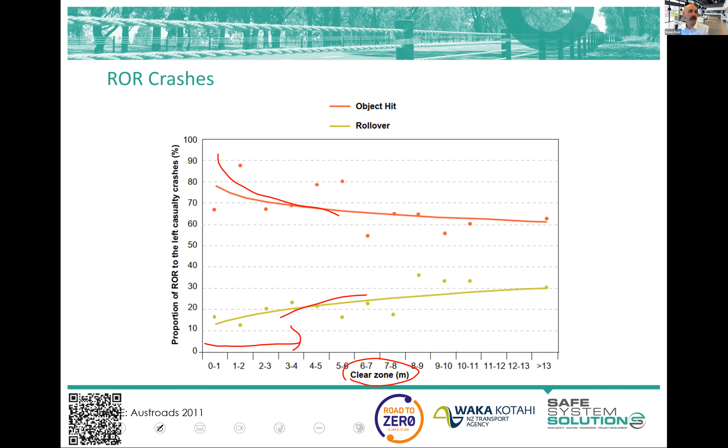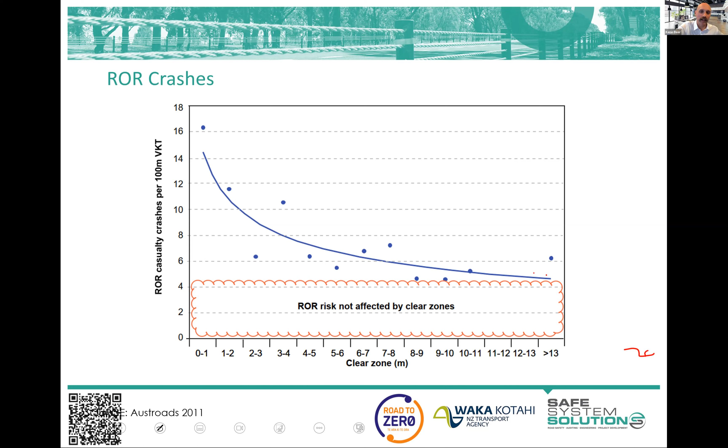So creating these cleared areas free of hazards, you just have to keep clearing and compacting the roadside to a level that's pretty much a shoulder in order to get to what we'd call a well-aligned safe system. But we're talking down here somewhere at 25 plus meters, and it continues to go down a little bit.

I'll jump through that. So clear zones, using this idea of a clear zone, is not necessarily a safe place to be. People go beyond that, they roll over. There was a time when clear zones were just the best we had - you leave the road, you want a cleared area to have a chance. It's probably right for about the first 4 to 5 meters, but after that, it's not.

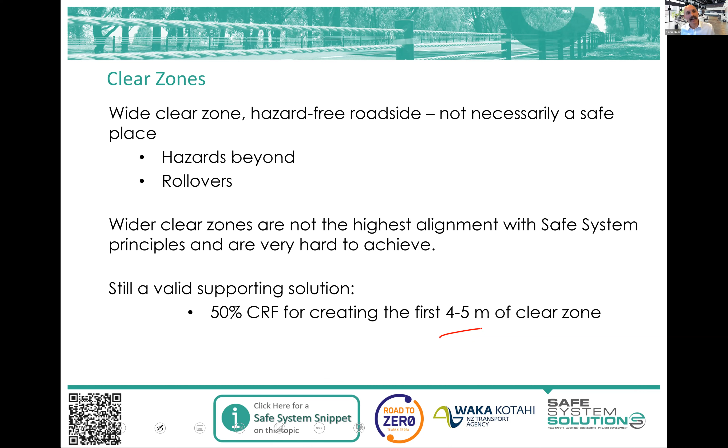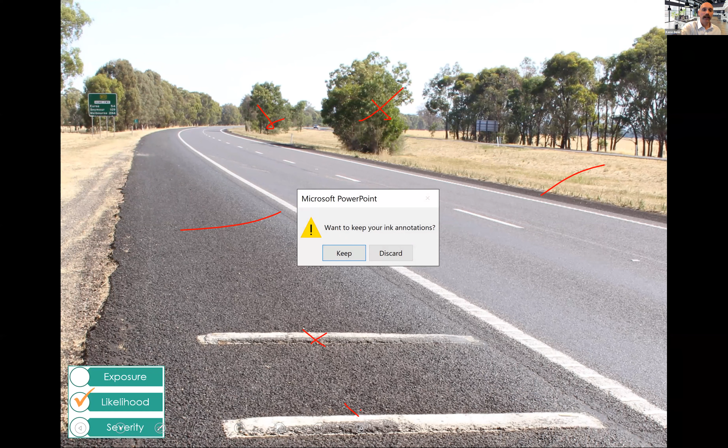So if we're building new roads or the like, 2 years ago Austroads would have told you to build it pretty much like this - well, probably not have those there, but a wide sort of median area, shoulder. We wouldn't have truck rumble strips, but they're just a trial we were doing on one of the roads. Essentially, you'd have all these fixed hazards at whatever you calculated as your clear zone, 9 meters, 12 meters, and this big calculated clear area in the middle.

We know heaps of people run off the road, they hit those trees, they get across the other carriageway, they go all the way to the other trees, they head-on crash.

So the new Austroads Guide to Road Design Part 6 is more progressive in this sense, and I'm not going to go into the details, but what we're looking at for highly aligned safe system roads in these rural high-speed environments - big state highways connecting major areas - is essentially full containment, bumper bowling of roads, barriers the full way. So we say, well, people are going to leave this lane and leave this area, and they should hit a barrier.

It's actually safer to have that barrier at 4 to 6 meters than to have a cleared area of like 20 meters. Now people find that a bit interesting, but that just shows how awesome barrier systems have become in the last decade. Flexible barrier systems are just amazing - they cost a bit of money, but they're pretty amazing.

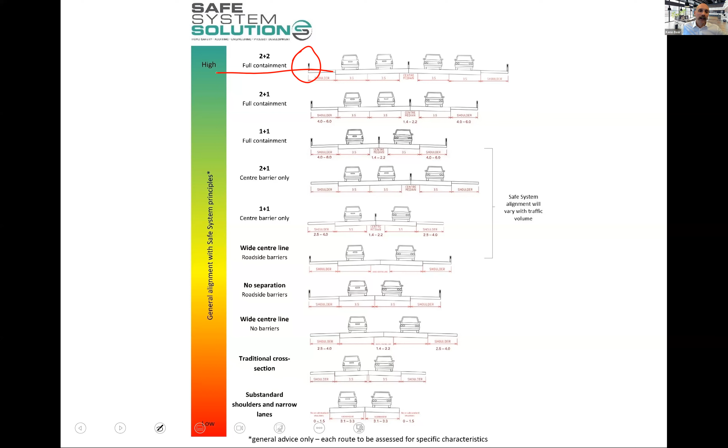We've got to think about how we implement it and all of those particular design specifics. Think about communities' reaction to it, and there's lots to work with. We had rolled out a lot of barrier at about this offset, which caused a lot of trouble - not because it wasn't a great road safety intervention, it was just that people really did not like having to break down and be stuck in these positions. So we got some learnings out of that.

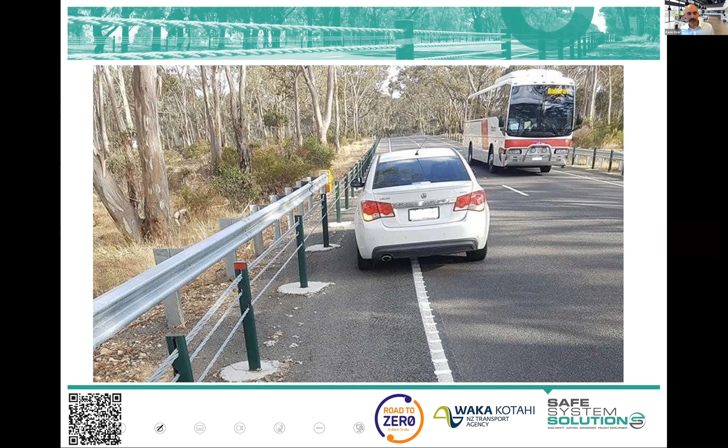I'll probably finish on this one, Kathy, to give us time to talk a little bit more, and I might bring up a few other things if we have time as well.

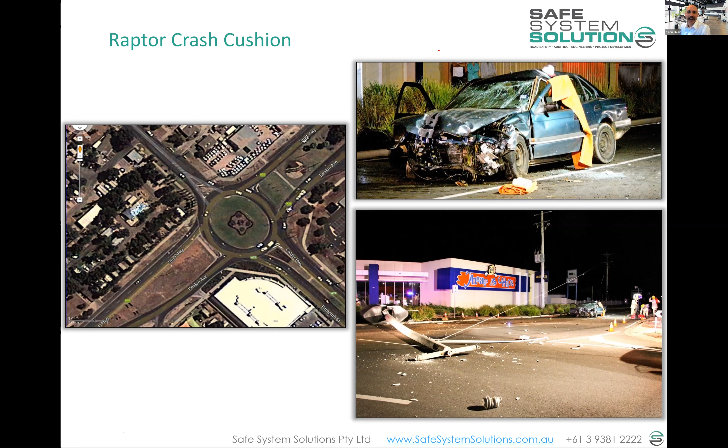But then a crash is going to happen. What's the speed? What's the angle? What's the mass of the vehicle? Just simple kinetic energy, and that's going to get transferred. Does that fit within our tolerable limits? So we're in the game of energy analysis now, kinetic energy analysis, as well as thinking about trying to stop crashes happening.

I don't think we've got another quiz, actually, or do we? No, but it was quite funny earlier. Keegan suggested we bubble wrap poles from now on, and I guess a raptor cushion kind of is a big bubble wrap around a pole, isn't it? Well, it kind of is. Am I still sharing my screen? No, I'm not. It's kind of bubble wrap plus that.

I use the analogy of a martial arts punch — they tell you to deflect the energy of the punch so it doesn't land directly. You think I've ever done martial arts in my life, Kathy? No. I love, I watched The Karate Kid. Well, that's enough, isn't it? You're an expert. Tell us a little bit before the raptor cushion, though.

There was a question about how do you cater for breakdown safety. I was showing continuous barrier systems, then a photo of a car broken down very much in the lane. For barrier design, the optimal offset for continuous barrier systems is 4 to 6 meters, so a vehicle has the ability to get out of a running lane.

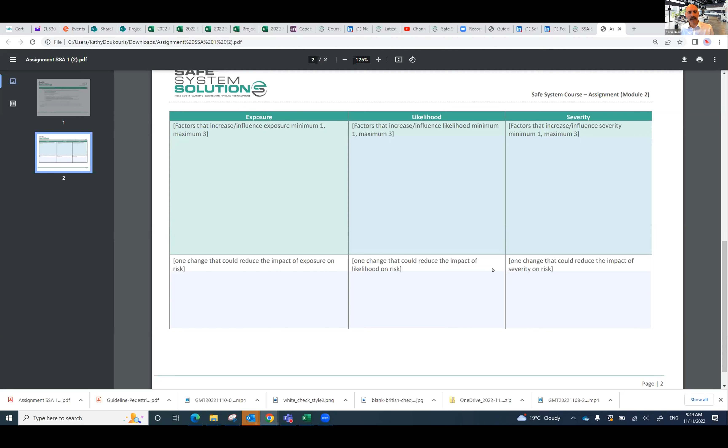Hopefully it doesn't take too long, because we're not asking you to give huge amounts of detail, just a few dot points, showing us that you understand that categorization.

Have a good little look at the intersection, we'll have a look at it as well. And then at the start of next session, we'll get somebody - if somebody wants to volunteer to talk us through their intersection - we'll give them the ability to unmute themselves and they can talk us through how they thought about exposure, likelihood, and severity.

So once you're done, you save it and just add the submission here. If you can, please get it done before the start of next session, and as Ken said, we'll ask someone to talk through it. It really sets you up for your next assignment, which will be your actual site visit, where we get you to go out to a site.

Are we going to ask people what they think the punchline is? No, we'll ask people whether they think it's funny. Is there a thumbs down option on the chat? No, conveniently there isn't a thumbs down option - there's a shocked face, yeah, that one. People don't like it. Somebody's laughing, see, yeah, one. You got 33%, I think some people are probably going to get it.